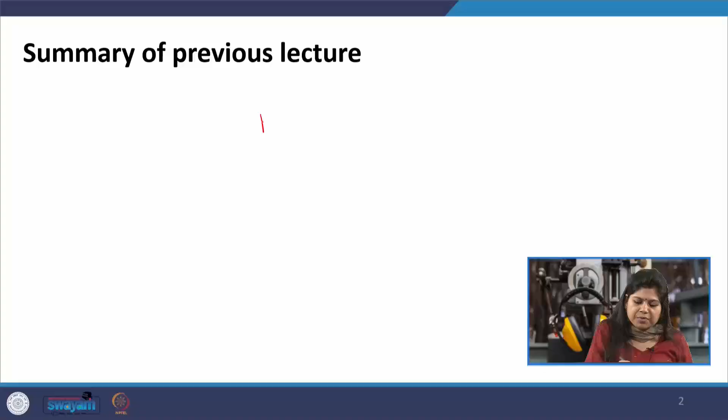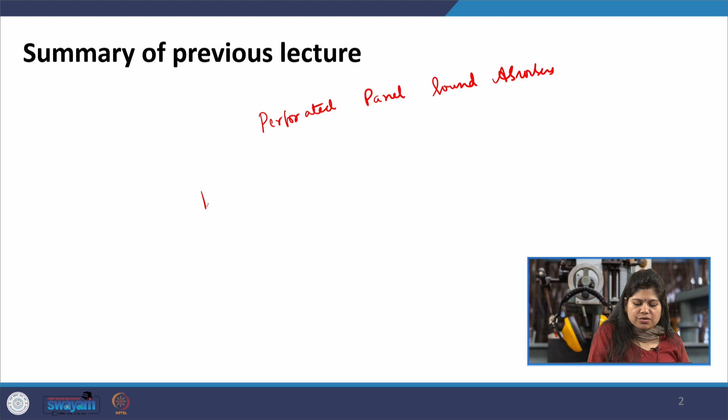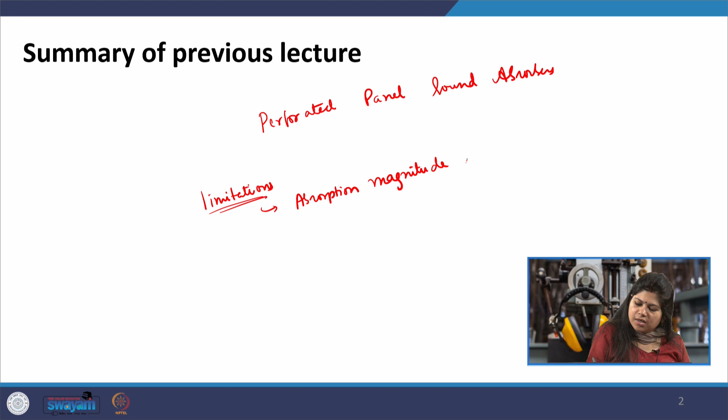So we have started the discussion on perforated sound absorbers, perforated panel sound absorbers, and we saw various advantages and limitations. One of the limitations of these perforated sound absorbers was that the absorption magnitude is low, even at low or high frequencies. Usually alpha is smaller than or equal to 0.8; it does not go beyond that for most of these. So that was initially the case, and then it was not worth using them.

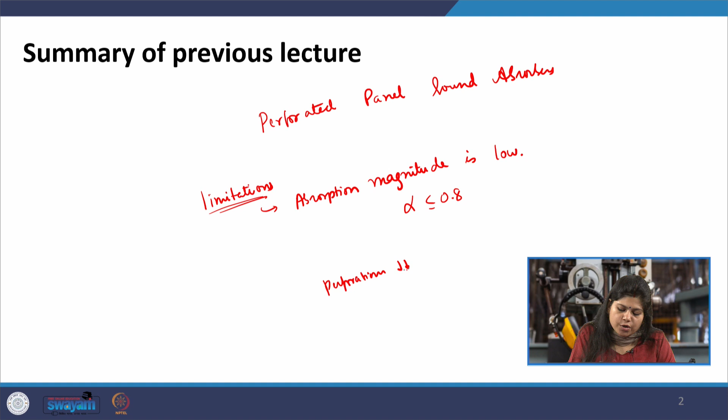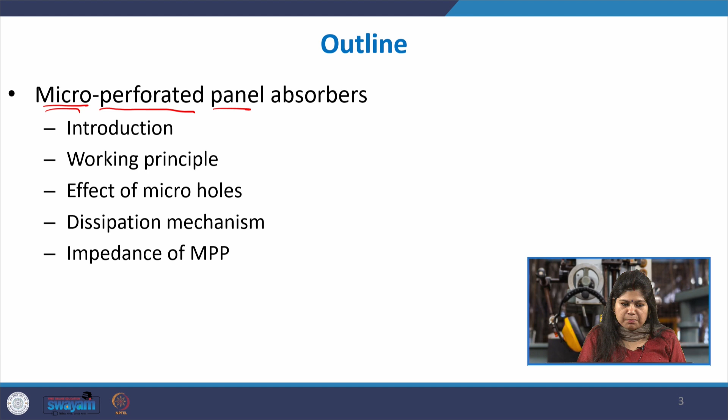But with advancement in manufacturing, we were able to design perforated panels where perforations would be very small in size, reducing the size of the perforations. Then a new phenomenon was observed when the perforations in the panel are very small in size, sub-millimeter or in the micrometer range. Suddenly the absorption magnitude shoots up. What was found was that not just the resonance phenomenon is there, but additional mechanisms come into play to increase the absorption in such panel absorbers. Hence these new panel absorbers were known as micro perforated panel absorbers, which we will be discussing in this lecture.

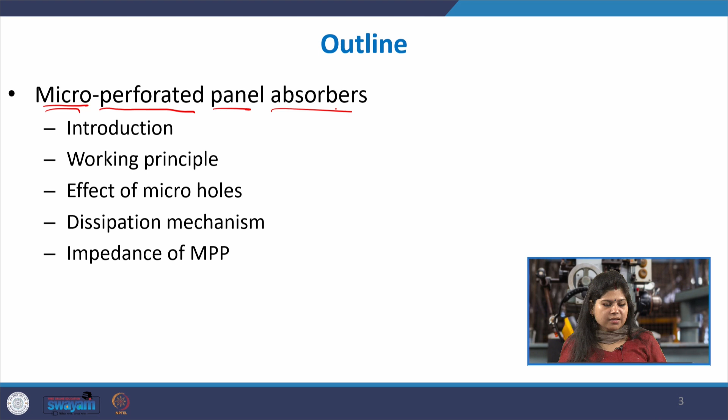So micro perforated panel, shortened as MPP in the literature, is a very common term used by noise control engineers. As I already told you, in the perforated panel the absorption magnitude is usually not that high. Various research studies were going on, but initially there was no manufacturing capability to make holes of very small size. With advancement in manufacturing technology, it has now become possible to manufacture holes less than 1 millimeter in diameter. When such small holes were made in these panels, it was observed that with holes of sub-millimeter magnitude, a new kind of absorption mechanism takes place, and such panels came to be known as micro perforated panels.

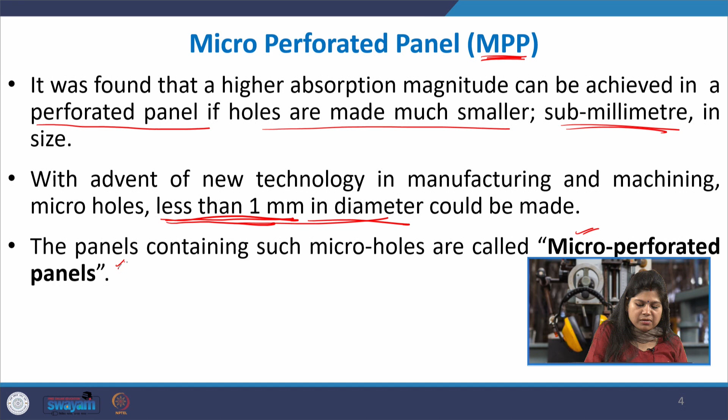It has been highly researched, and a model for this has been derived by Professor Dah-You Maa, who is credited for most of the theoretical underpinning of MPP absorbers.

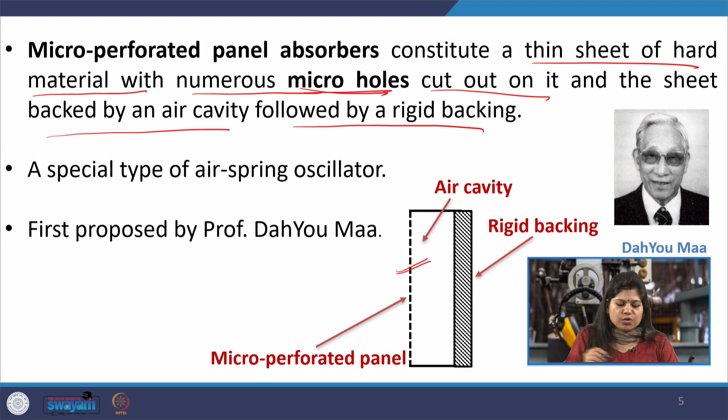So what is an MPP absorber, or micro perforated panel absorber? It constitutes a thin sheet of hard material with numerous micro holes—by micro hole I mean holes in the micrometer range, or less than 1 millimeter. These numerous micro holes are cut into the sheet, which is then backed by an air cavity followed by a rigid backing. So, very similar to a perforated panel, the difference being that the holes are now less than 1 millimeter in size. This also acts like an air spring oscillator.

Let us look at the working principle, which is mostly the same as what we saw for perforated panel absorbers. Sound is incident on the MPP, and it sets up resonance at the frequency when the incident frequency matches the fundamental frequency. At those frequencies, this amplifies.

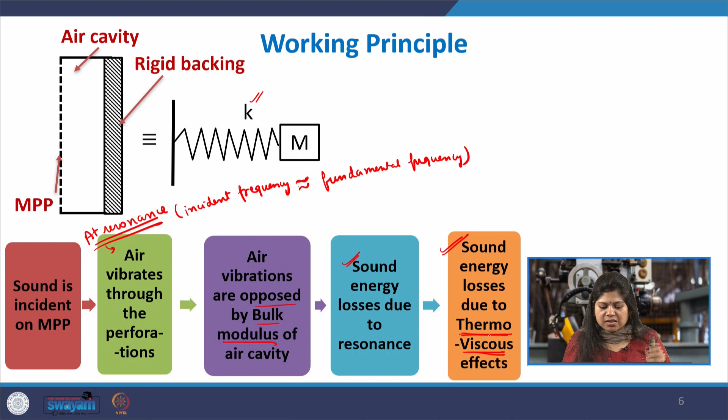The air vibrates through the perforations in the panel and goes into the air cavity, which is confined in nature. Because of its bulk modulus, it tends to oppose the motion and acts like the restoring spring of the oscillator, while the mass of air in the small tubes acts as the oscillating mass. Sound energy losses happen due to this resonance as we set the mass-spring oscillator into resonance, but at the same time there are additional energy losses due to thermal and viscous effects, or combinedly the thermo-viscous effects. This is the additional mechanism that comes into play.

So here in the resonance, it is behaving as a mass spring oscillator. The small tubes of air that are oscillating to and fro, the mass of these acts as the mass of the oscillator, and the air confined within the cavity with its bulk modulus acts as the spring.

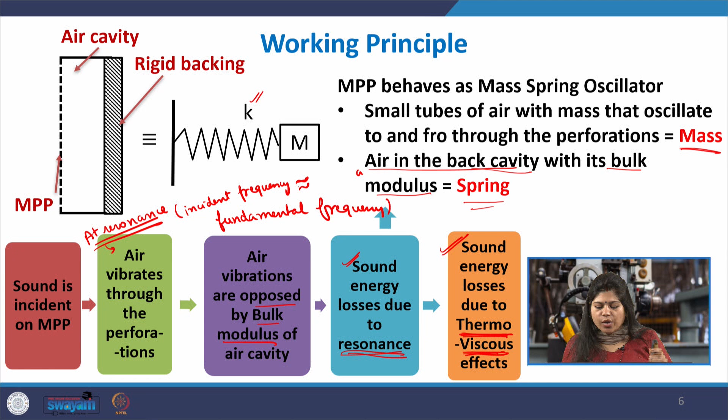But other than the dissipation at the resonance, or the resonance-based dissipation, we also have dissipation. Sound energy dissipation means the loss of sound energy as heat. So there is either the dissipation due to resonance vibration, or there is a loss due to thermo-viscous effects. Let us see what that is.

The neck in this case, same as here also, the MPP absorbers act as a large number of Helmholtz resonators with a very small neck, and this thin neck is the thickness of the sheet. Here the length of the neck becomes the thickness of the sheet, and the air volume is simply the air volume enclosed between the panel and the backing.

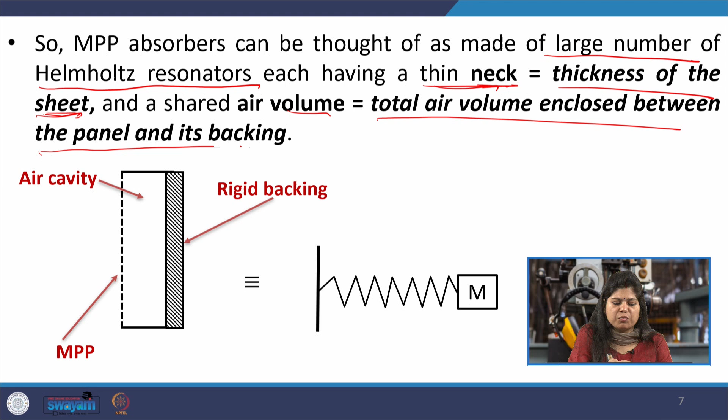Now what is this additional absorption mechanism? The rest of the thing is same as the perforated panel. So what happens is that when these holes or perforations become very small, less than 1 millimeter, then the thickness of the viscous boundary layer around the orifice becomes of similar order of magnitude as the hydraulic diameter of the hole.

So whatever is the diameter of the hole, it approaches the thickness of the viscous boundary layer between the solid and fluid interface, and hence within this small range, the boundary layer and the hole dimension are of the same order of magnitude. Then we cannot neglect viscosity, so high viscous losses are observed.

So when the fluid is flowing through these perforations, essentially when sound waves enter the perforations - sound waves are longitudinal fluctuations or oscillations of air particles - these air particles are oscillating to and fro and passing through these holes, but their movement is resisted because of the viscous effect. So there is a viscous drag which opposes the flow of air particles through the holes, leading to high viscous losses and a rise in absorption magnitude.

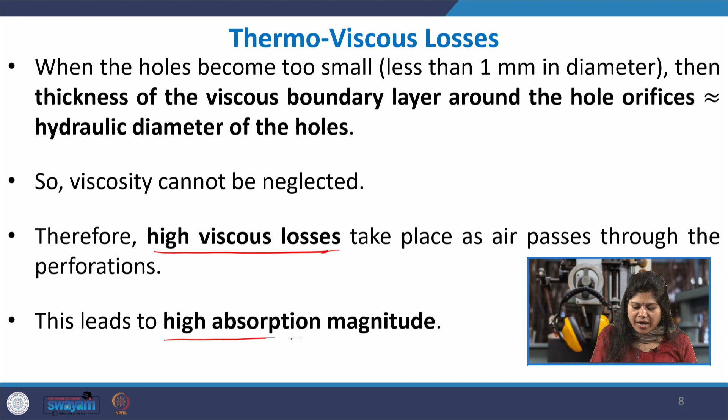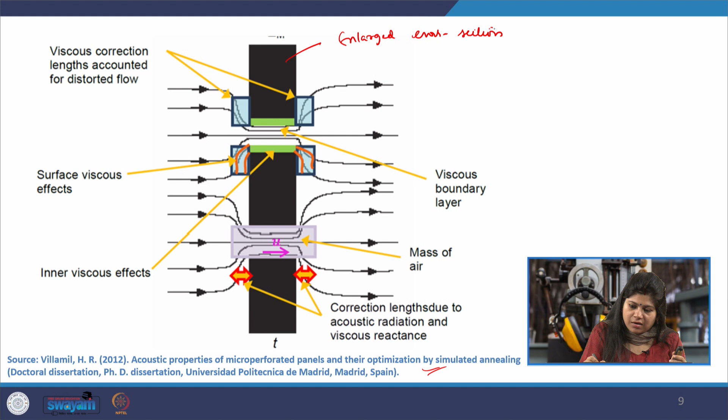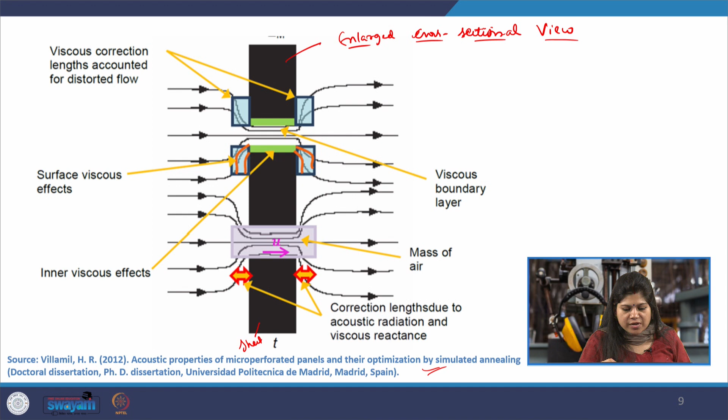As you can see here, this is from one paper where they have explained this. This shows an enlarged cross-sectional view of the sheet or panel and the various holes, and here the viscous boundary layer and the hole dimensions are the same order of magnitude, and this is how the viscous drag comes into play - it resists the motion in and around the solid surface.

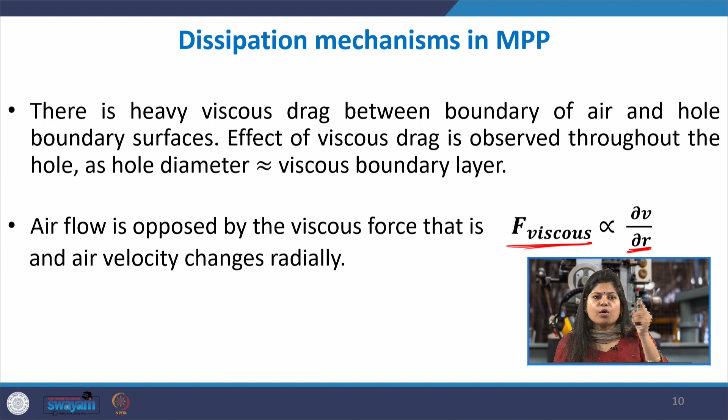Because of that, we know that the viscous drag force is directly proportional to del V by del R. So as resonance happens, meaning as the acoustic particle velocity or vibrations increase in magnitude, there will be more viscous losses. The vibrations are maximum when the fundamental frequency and incident frequency are the same, so there the viscous losses will increase further. At the peak, the viscous losses will be even higher, and the peak will suddenly shoot up in magnitude.

This shows a more enlarged view - these are the zones of viscous resistance, and this is the overall hole, and what you can see is that proportionally a lot of losses are taking place through these small holes.

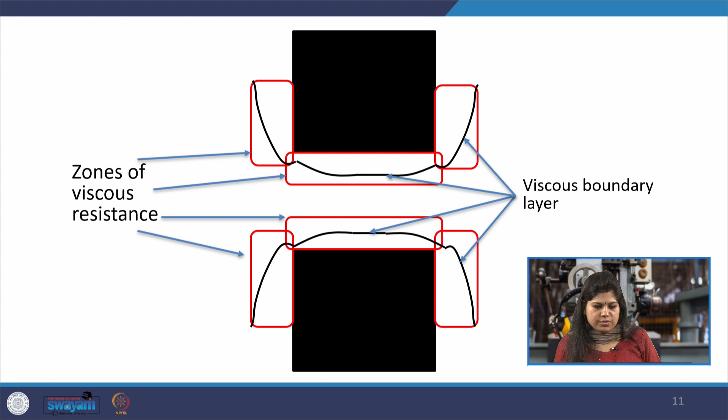So there are some additional mechanisms as well. We already studied resonance oscillations and viscous losses. We also have frictional losses, where the airflow is opposed by the friction between the air molecules and the surface of the hole.

This is typical frictional resistance. At the same time, you have some additional thermal and inertial losses, because these molecules or air particles which are vibrating to and fro, they are trying to compress or expand air enclosed within the cavity as well as hitting the panel, and this periodic expansion and contraction can lead to some thermal losses. But they are not much of consequence. In general, resonance and viscothermal losses, or viscous losses, dominate the absorption phenomenon, and other forms of losses do not have that much significant effect.

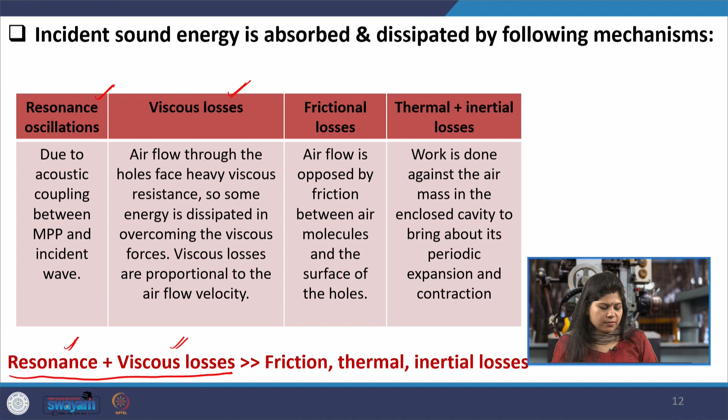Just like in the case of other resonance absorbers, the fundamental frequency matters a lot, because at these frequencies, the fundamental frequency and its integral multiples, you should be getting an absorption peak. So the fundamental frequency matters.

Therefore, the fundamental frequency of the MPP also needs to be obtained, but because of these viscous effects and the micro size dimensions, it is usually not that easy. You do not have a very easy formulation of the fundamental frequency; rather you have a very complicated model.

The acoustic impedance model for an MPP is quite complicated in nature, and this is for an MPP where the hole spacing is much larger compared to the radius of the hole. For this case, an acoustic impedance model has been derived, given by this complicated huge expression, where various things like the coefficient of viscosity, the thickness of the panel, the density and speed of sound in the fluid medium, the porosity of the panel, the radius of the hole, and the incident sound wave frequency all come into picture.

All of these are going to affect the overall acoustic impedance of an MPP, and we know that alpha equals 1 minus the quantity Z minus 1 over Z plus 1, whole square, for the interaction. So if these parameters affect the acoustic impedance, they will also affect the absorption coefficient. All of these parameters are going to affect your absorption.

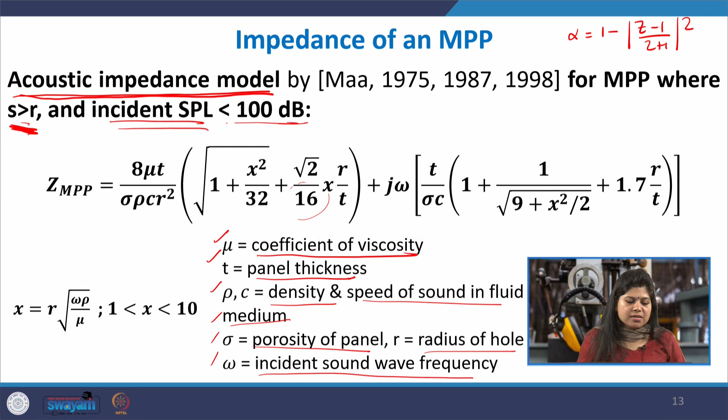Now, we know that this is going to give us the surface impedance of the micro perforated panel, but the micro perforated panel does not act alone in isolation. The panel is backed up in most cases by a rigid backing or a cavity. So this is the Z of the MPP, but the total absorber is composed of an MPP plus a rigid backing, an air cavity, a confined air cavity with a rigid backing.

For that, the impedance due to this confined air cavity also needs to be obtained. So the total Z of the micro perforated panel absorber would be Z of the MPP plus the Z of the cavity behind it. You can think of this cavity as like a long tube being driven by a harmonic plane wave source, and to derive a formulation, you can imagine the beginning of the air cavity as x equals 0, and here you have the x axis, with x equals 0 here and x equals d here, and in this one dimensional wave equation you can obtain the result.

So, the pressure wave is given by this formulation. It could be a combination of a wave going in the forward x axis and a wave going in the backward x axis. So, just a generic formulation is given for a plane harmonic wave. This is the general expression for any kind of plane harmonic wavefront in this cavity.

If you do the differentiation of this expression, this is what you will get. Now, you can apply the rigid boundary condition. At D we will have a rigid backing when the air cavity ends, but here we have the opening because the sound molecule is sort of entering through this. So, there is no rigid backing here, but here we have got some rigid backing.

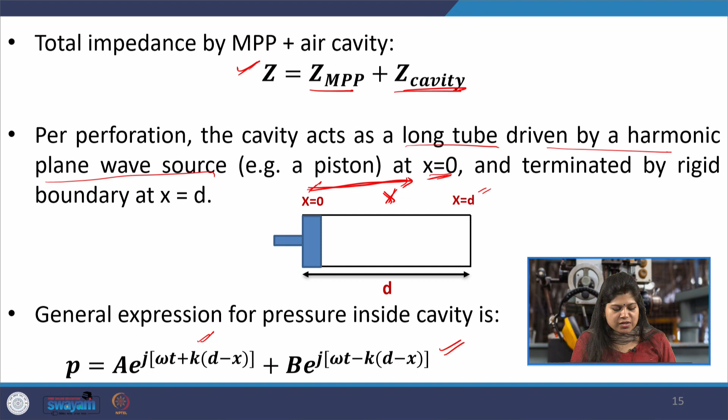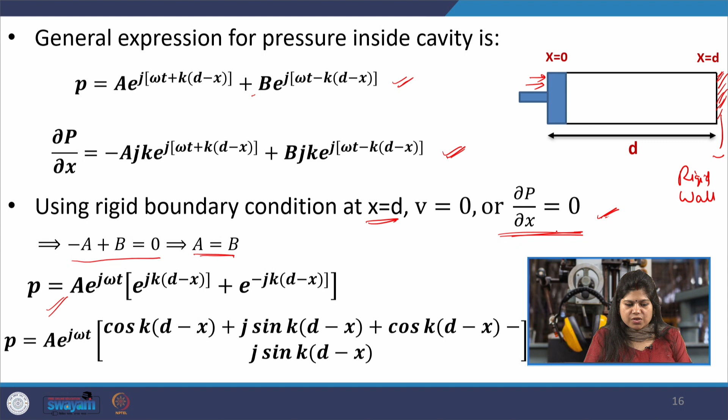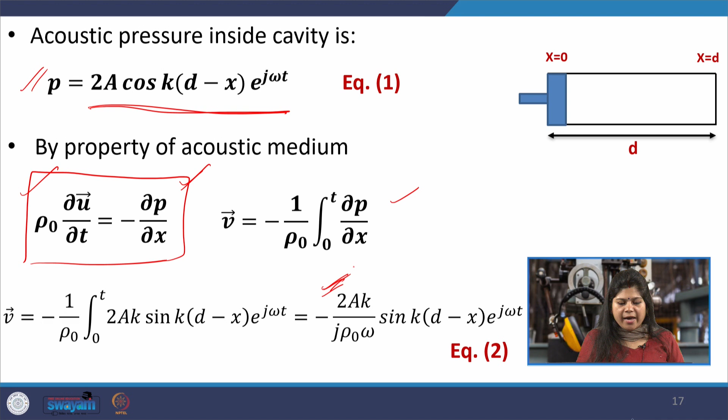So, anyways, the end result is going to be, once you follow this process step by step: you take a generic expression of the pressure wave, you put the boundary condition as at x is equal to d, your velocity is becoming 0, which means that the pressure gradient is going to 0, and then you solve, you get an equation for P, you solve further, and then you use this particular property and find the equation for V, and P by V you get and solve it. So, this becomes your Z of cavity.

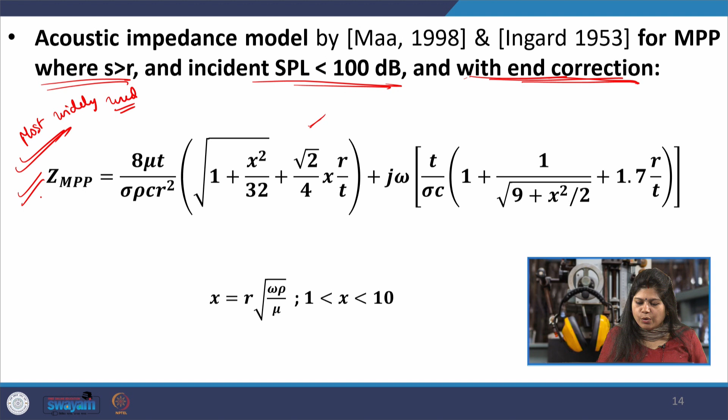So, with this what will happen, now you know this formulation. So, you can simply say that the Z of MPP is already known by this formulation, and now the Z of cavity is known by this formulation. So, you can get the total impedance of the MPP sound absorber, and once you have this, then you can find out the absorption coefficient.

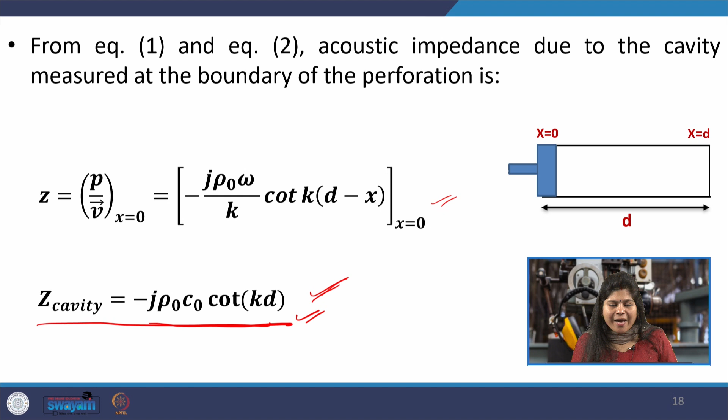So, as you can see, it is very complicated and very complex. So, a straightforward solution is not there. Usually people use various kind of data driven approaches and techniques to actually solve the impedance of the micro perforated panel, and for this particular lecture course, we are not going to go into the detail of what kind of data driven approaches are actually used to solve various MPP based kind of problems where you find out the absorption coefficient of an MPP. It's not within the scope of this particular introductory lecture.

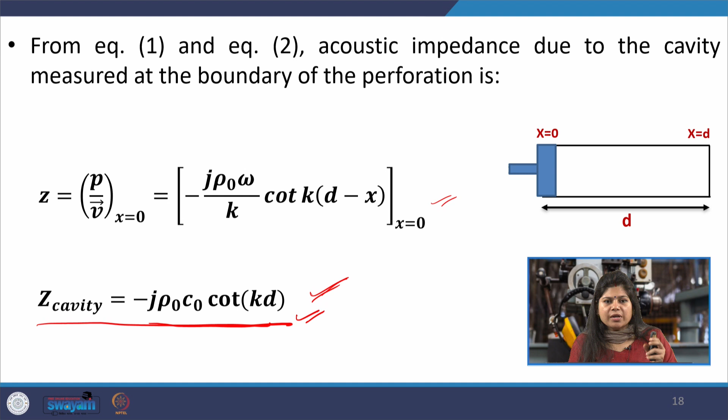So, just you see the expressions, and in the next class we will see that based on the expressions that are derived, what is the effect of the various parameters on the overall acoustic impedance, and what is the effect of these parameters on the absorption coefficient.